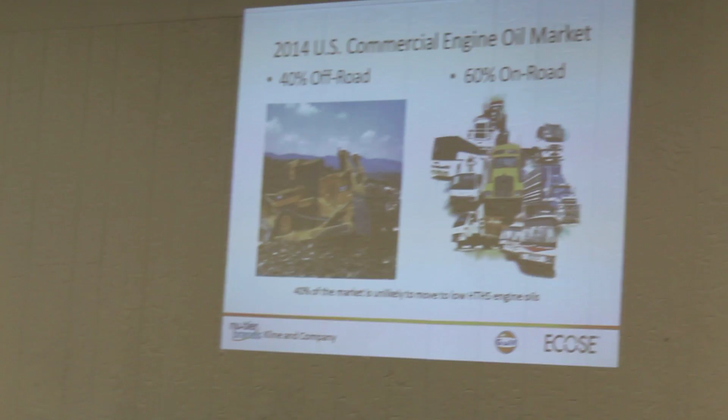Low viscosity oils do not impact the off-road guys at all—dozers, loaders, farm tractors. FA4 isn't there yet for them. They're going to be all about CK4 products, so they can move comfortably to a CK4 and not worry about it. The on-highway segment is where we're talking about the two different categories.

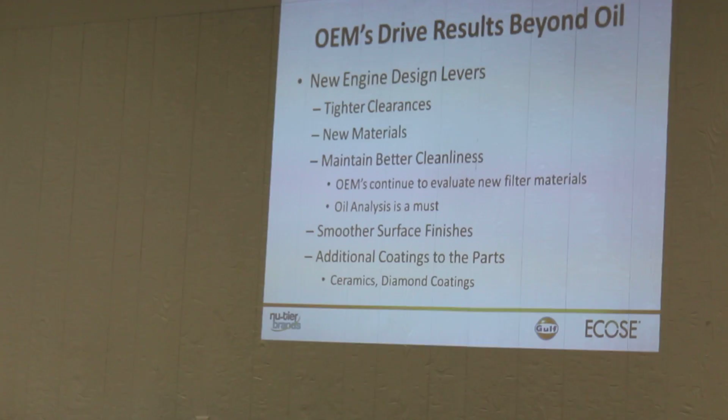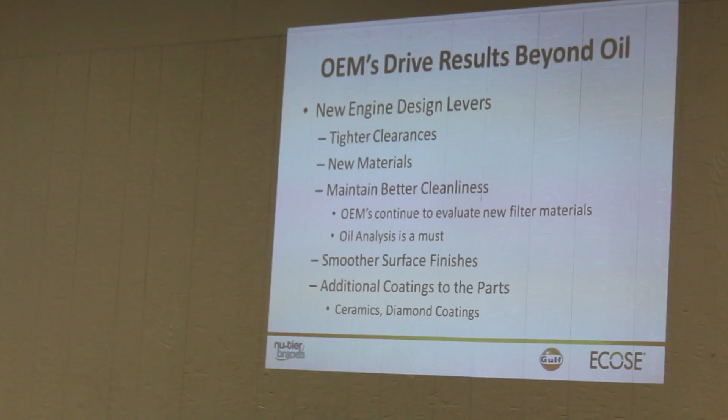Part of the engine design changes I mentioned, in addition to downsizing and downspeeding, you're going to see tighter clearances, new materials within the engine. Cleanliness is going to be huge with these lower viscosity products. When you reduce that oil film, you don't want any dirt in there. Fuel dilution reduces viscosity anyway, so you don't want to have fuel dilution in there either.

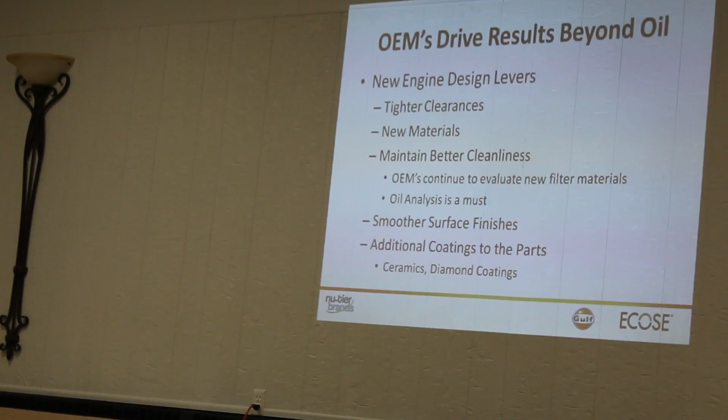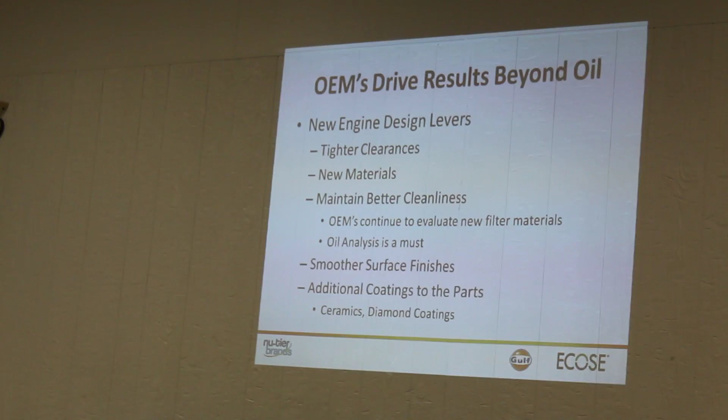So oil analysis is very important. The engines are going to have smoother finishes, although they seem pretty darn smooth now. They're even going to become smoother, with additional coatings on some of the parts—ceramics, diamond coatings—that'll make them cheaper, I'm sure.

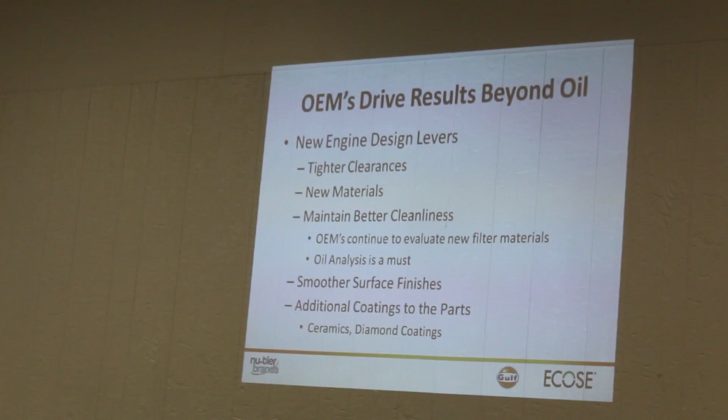Okay Chris, to your question—Detroit now. I've been reading some information, not on Detroit as of lately, but some of this is still a little bit undecided. So that's another reason it's going to be very important to work with your salesman, whether it's with the engine manufacturer or a truck dealer.

But Detroit was embracing the FA4 technology. They were going to move forward, the last that I heard, to use the FA4 lower viscosity oils.

The guys in the middle—Cummins, PACCAR, Mack—they weren't really sure. From what I've read lately, when their new trucks start to hit the street, they are going to start out recommending CK4 10W30 rather than the FA4. They're not totally comfortable with that technology yet. So those guys in the middle, a lot of them are going to go with the CK4 10W30 for now.

I don't know the mandate from EPA, what their timetable is as far as hitting these mileage numbers, but it seems like they have a little bit of leeway here to get to those numbers. And the off-road guys—Cat, John Deere, Case, New Holland—those guys are just going to go CK4. They don't want to have anything to do with the new FA4 type oils.

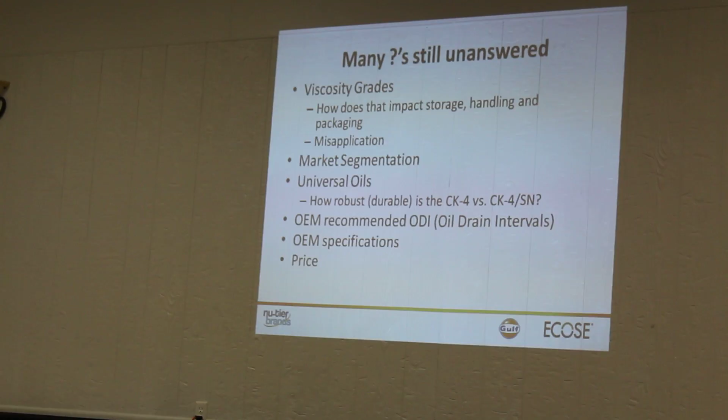So, where do we go from here? Think about this—you're a fleet owner. You have old trucks, old equipment. You have some newer trucks. And then 3 years down the road, you buy some more new trucks.

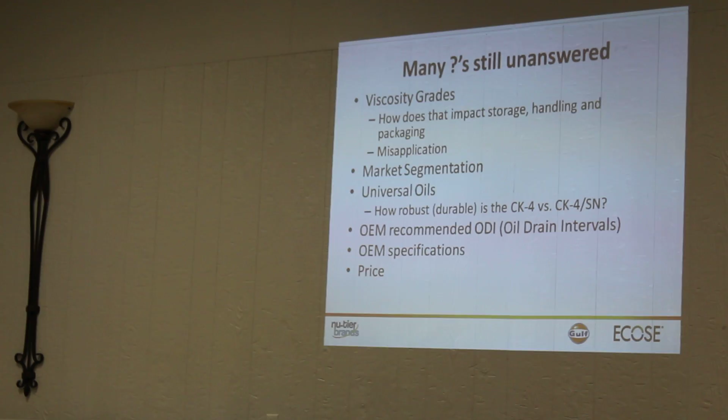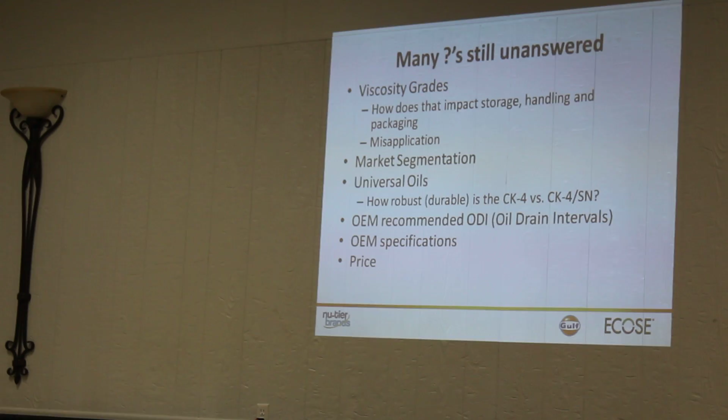You could be looking at—currently you're running 15W40, and the older stuff you have, maybe you have a little bit of off-road stuff. You buy a 2017 truck, it calls for a CK4 10W30, a different oil. 2 or 3 years down the road, you buy another new truck, it calls for an FA4 10W30. Now you've got a third oil.

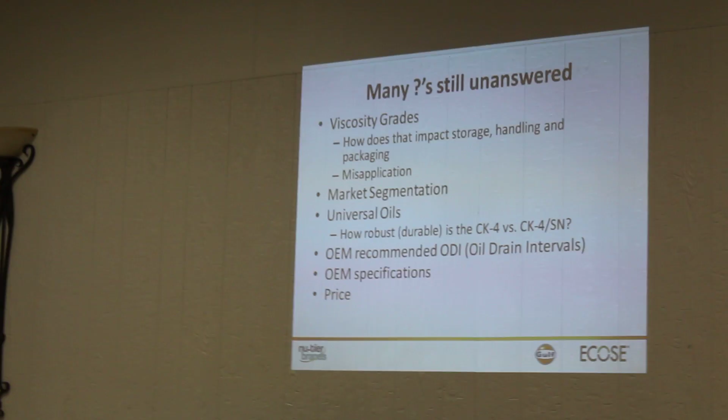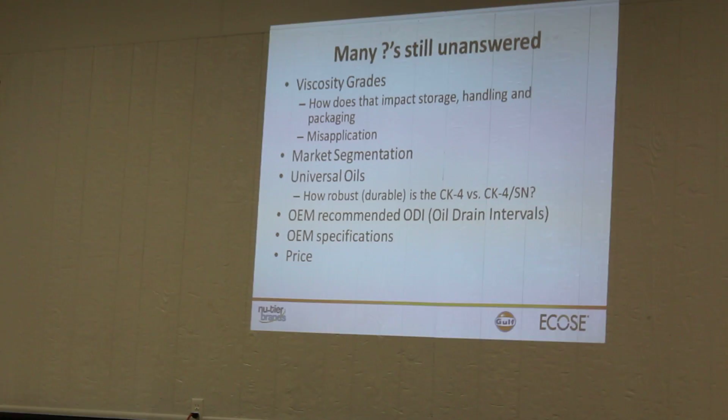That simplifies things, doesn't it? So it's going to create some challenges—storage for distributors like Superior, hauling it, delivering it, those kind of things. Misapplication—how do you keep your guys in the shop from putting the wrong oil in the wrong engine?

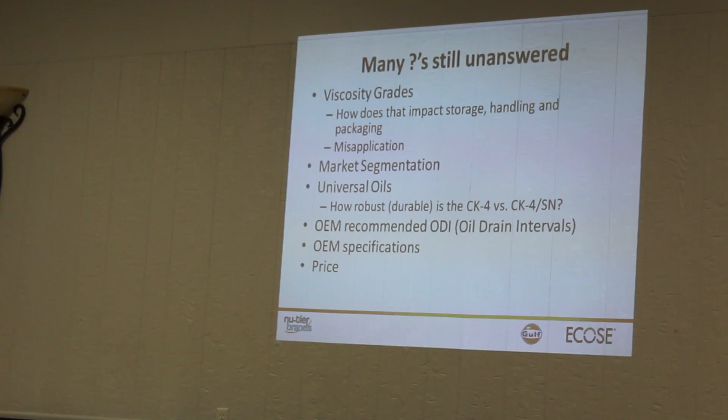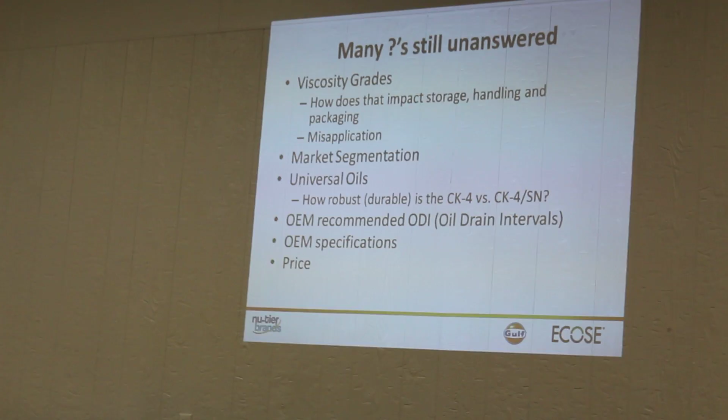If you are a mixed fleet using universal oils, are you going to continue to use them? How good are they going to be? OEM—I've seen a little bit of stuff on the CK4 as far as drain intervals, but I've not seen anything on FA4. What's the recommended drain interval going to be? What OEMs are specifying what, and then of course price is always an issue, always is.

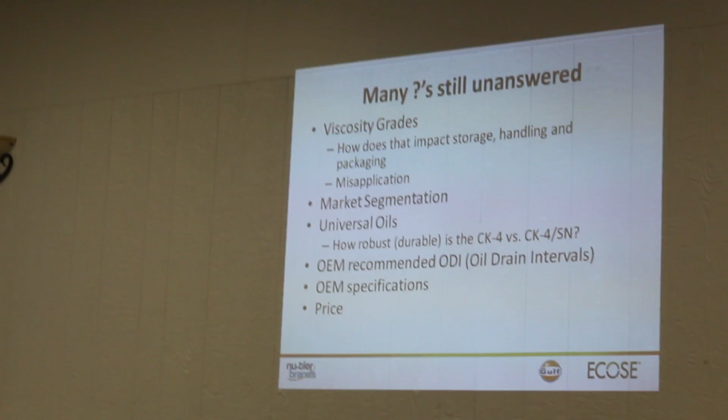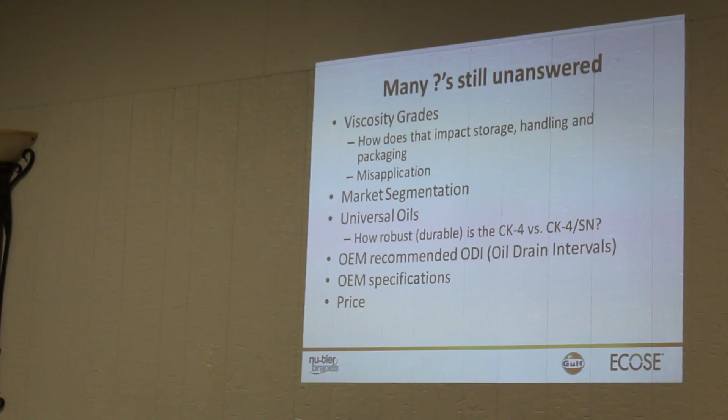Now I'm told, from what I'm hearing, that the jump from CJ4 to CK4, price-wise, is going to be minimal—it's not going to be that much. I don't know yet, and I've not heard a lot yet, what the jump from CJ4 to the FA4 oils will be. It's probably going to be a little bit more, but that's speculation on my part, so we'll see.

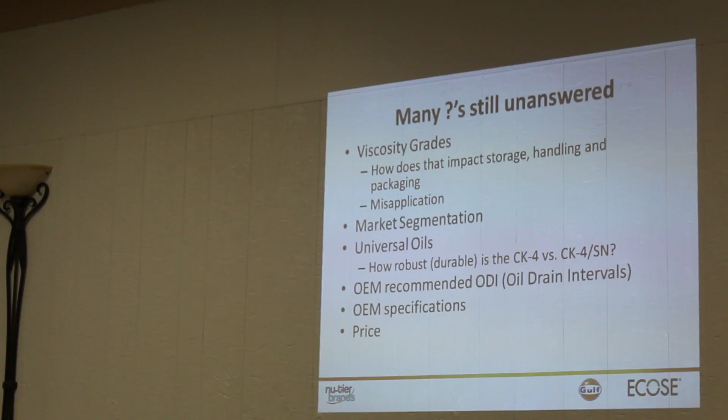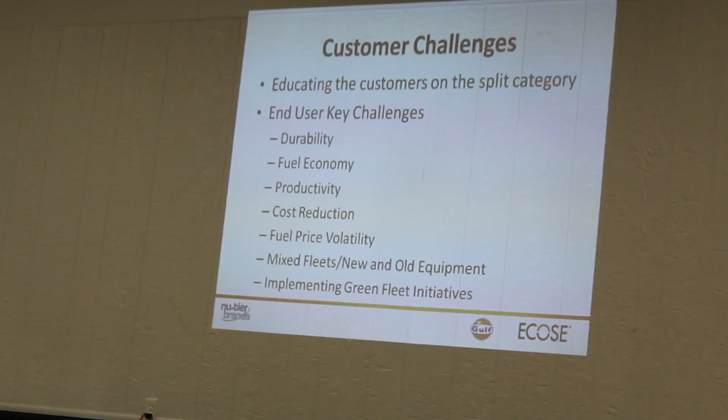So again, here you are—you have these different oils on the market, these different options, multiple products in your shop. How can you simplify this? So there's challenges. You need to look at your goals—durability, fuel economy, things like that.

Sales guys, it's a great opportunity to work with your customers. They're going to face some challenges, face some decisions. Customers, talk to your sales guys, your Superior sales guys, your truck salespeople.

CK4 is backwards compatible. Most equipment manufactured within the last number of years, if you're running 15W40, the owner's manual will tell you that 10W30 is okay too. So maybe you move to a CK4 10W30 for your whole fleet if you don't have any units calling for FA4. Those kinds of decisions are going to be out there for people to talk about and make moving forward.

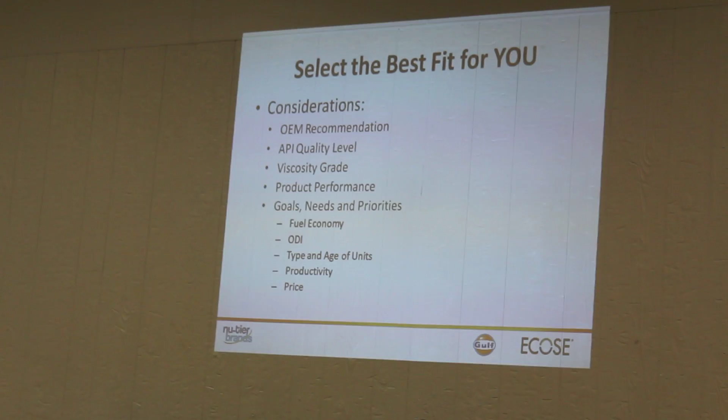In addition to that, all of us as oil companies have multiple tiers of products. We have regular mineral-based 15W40, 10W30. We have synthetic blends, 15W40, 10W30. We have full synthetics. So not only do you have the CK4, FA4, CJ4 products, but you have those different performance categories.

I have a question. You were saying the FA4 and the CK4 - okay, we put it in our tanks and pump through one pump. Do we put another pump system on it, or can they be cross-contaminated a little bit? Like railroad engine oil.

From that standpoint, they're compatible. The additives are similar, the additive packages are the same for the most part. The big difference is going to be that viscosity number. So I'm sure a little bit of FA4 oil in that CK4 isn't going to hurt. I don't know what the cutoff is, but it's probably where we'd flush.

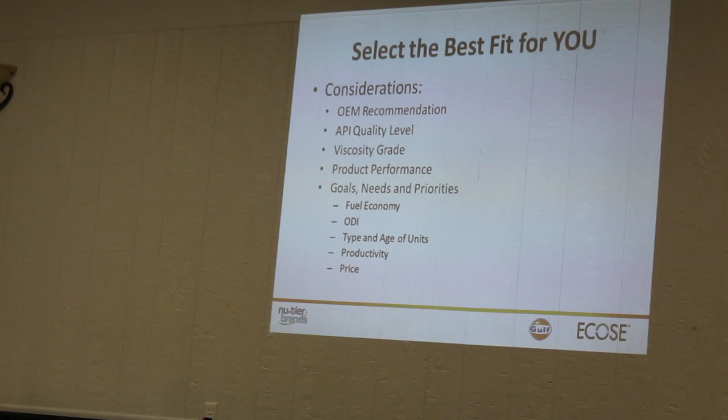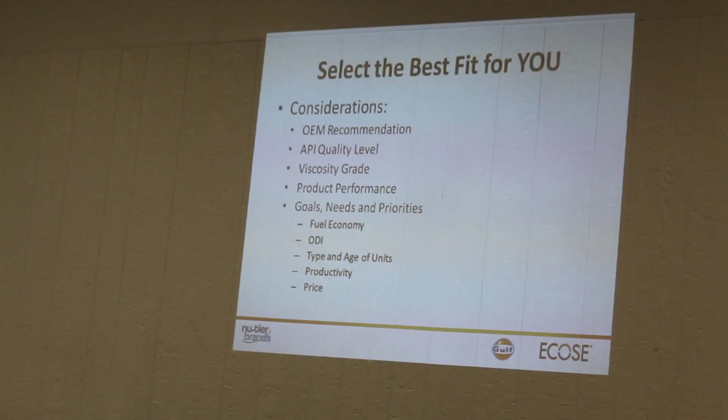Most of the time when you're talking about railroad engine oil and those types of products, you're talking about really incompatible additive packages. Well, that's right, and these basically have the same additive package, it's just the HTHS that's different. So a little bit of mixture is fine.

What happens if the guy buys an engine needing FA4 and says I can use CK4 instead - can it destroy that engine? It's certainly not going to do it any good. I really can't say it would destroy it, but it's certainly not going to do it any good because you have these tighter clearances - is the higher HTHS viscosity oil going to be able to get in there and lubricate as it should?

That's yet to be determined, but I don't think you want to be the guy to find out the answer. I know they're out there. Oh, absolutely, I see it all the time - people that just say I ain't doing that, I'm using this. I guess that's their choice, it's their money, right? But I certainly don't recommend it.

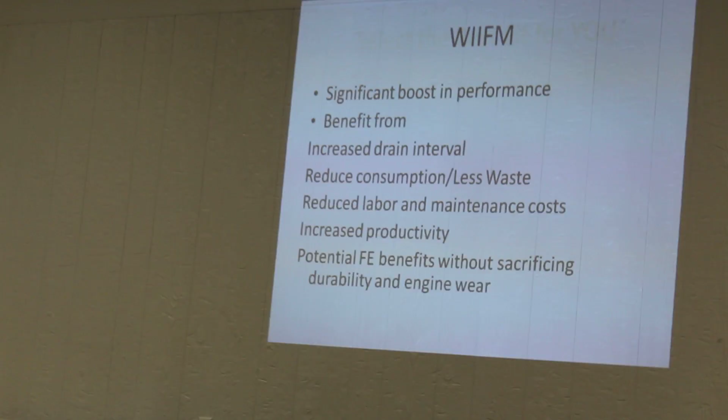So that won't be like full synthetic only, it's going to be across the board there too with that new stuff, right? Exactly, these new specifications - really there's not going to be any change as far as, you're going to have mineral-based products like we do, you're going to have synthetic blend products, and you're going to have full synthetics. I don't know what the offering is going to be.

I know from the Gulf perspective, because the demand is going to be so low for a while, our plan, from what I'm told, is we are going to have one FA4 10W30 available. On the CK4 side, we're going to have what we have today - a mineral-based product, a synthetic blend offering, and then full synthetic as well.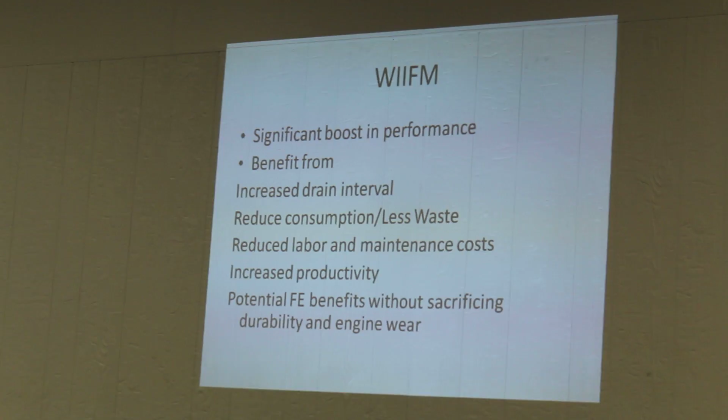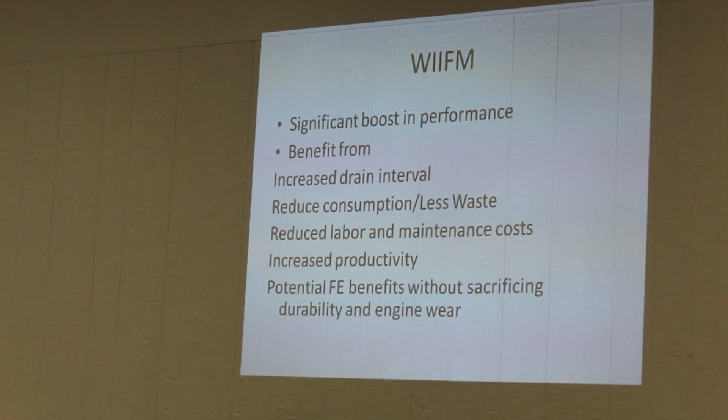But because of the side with the engine manufacturers, because of the Cummins and the PACCARs of the world introducing or specifying CK4 products, I just don't think the demand on the street is going to be that great for FA4 products for a while. We'll have one for those that need it, but the largest majority of sales are going to be on the CK4.